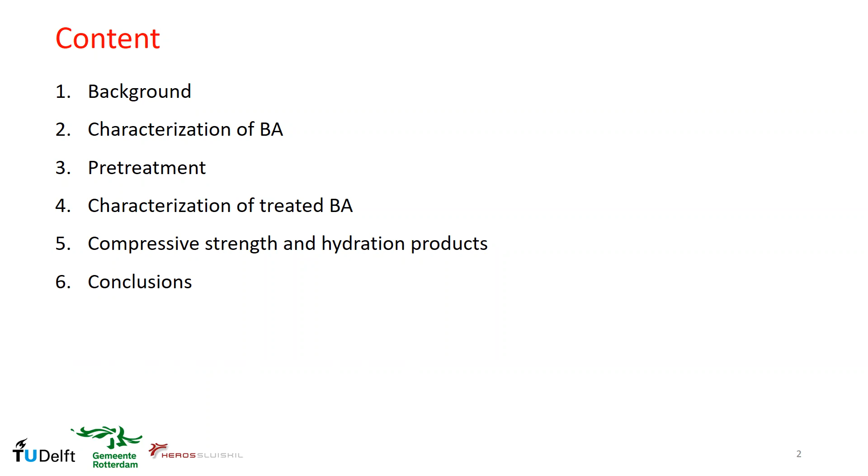And in this special section on recycling materials, I would like to share with you my study on municipal solid waste incineration bottom ash. And the topic here is the potential application of MSWI bottom ash as substitute material in Portland cement concrete. And here is the content I would like to talk about today.

First, the background of this study. Here we see from 1995 up to 2019 in Europe, each person generates about 500 kilograms of municipal waste every year. And we see in more recent years, more waste materials are being recycled and incinerated, and less of the waste is directly landfilled. However, there are still about 25% of incineration waste materials to be dealt with.

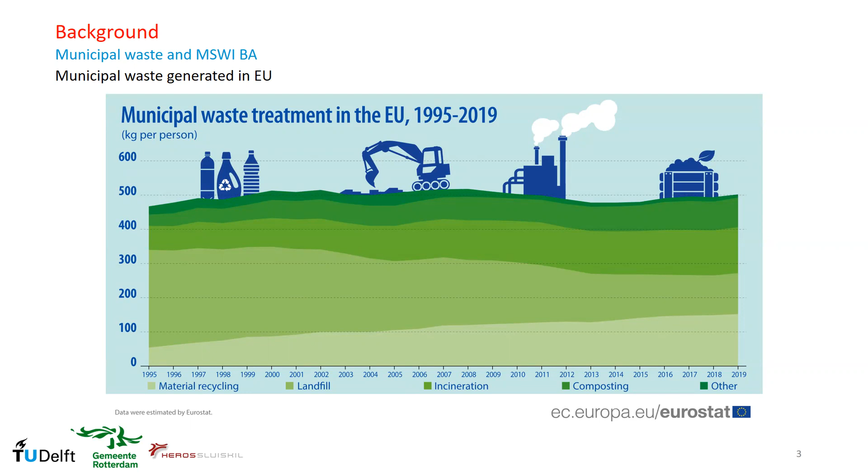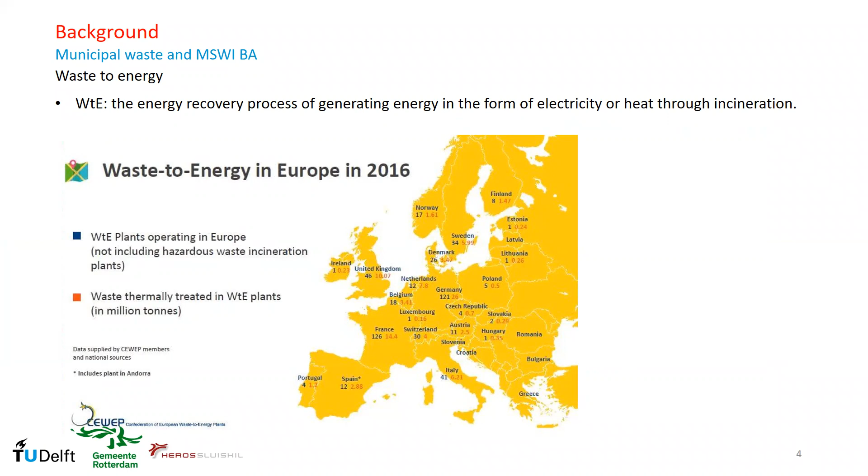And here is the so-called waste to energy process, which is the energy recovery of generating energy in the form of electricity or heat through the incineration process. And by doing so, we have mainly two kinds of byproducts, namely the fly ash and the bottom ash, and they are regarded as zero cost raw material. And their application could be regarded as both the conservation of resources and the elimination of waste. And today, here we focus on the application of bottom ash.

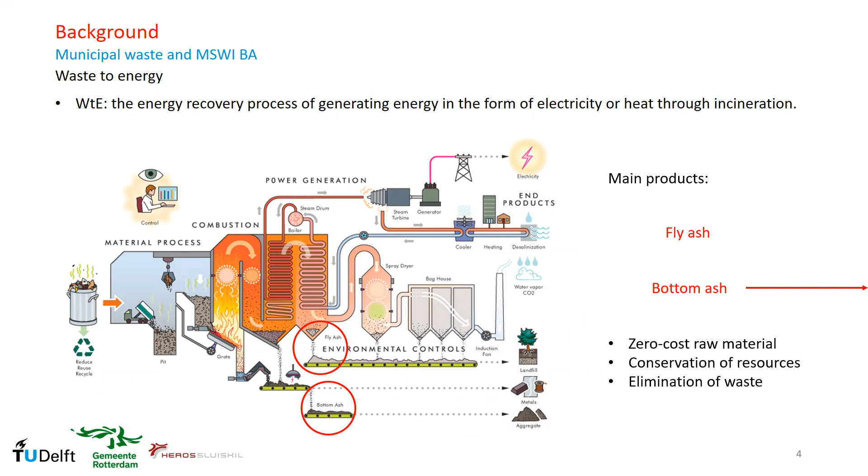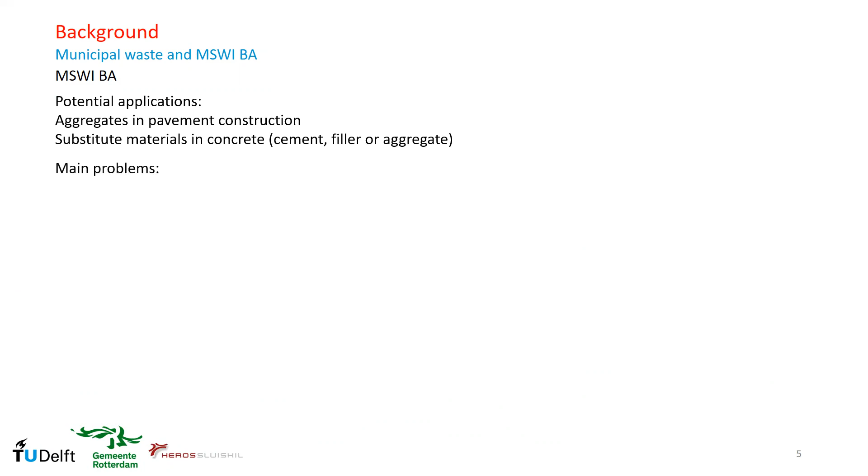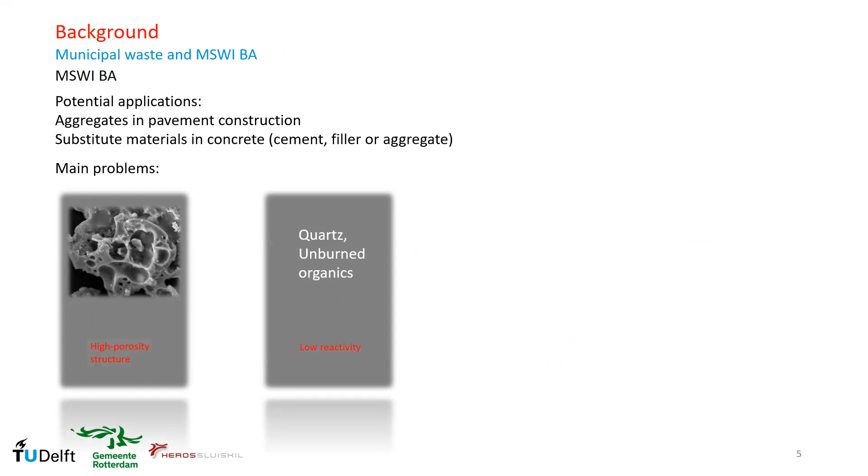And according to the literature, here are several potential applications regarding the bottom ash. First, they could be used as the aggregates in pavement construction, and they could also be used as substitute material in concrete, as cement, filler, or aggregate replacement. However, there are several main problems. First one is their highly porous microstructure, and then the lower reactivity due to the quartz and the unburnt organics.

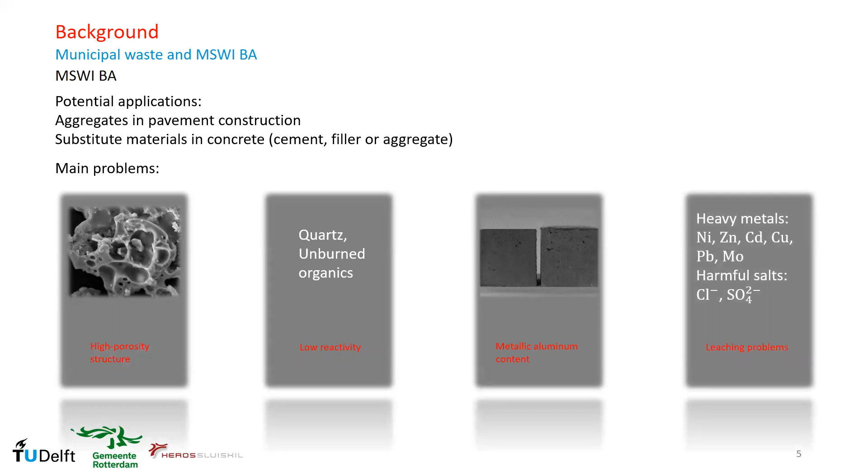And the third one, the volume stability issues due to the metallic aluminum content in bottom ash. They will generate hydrogen bubbles due to the reaction between aluminum and the alkaline environment in Portland cement. And so they will cause expansion in hardened paste. Finally, the leaching issues related to the heavy metals and harmful salts.

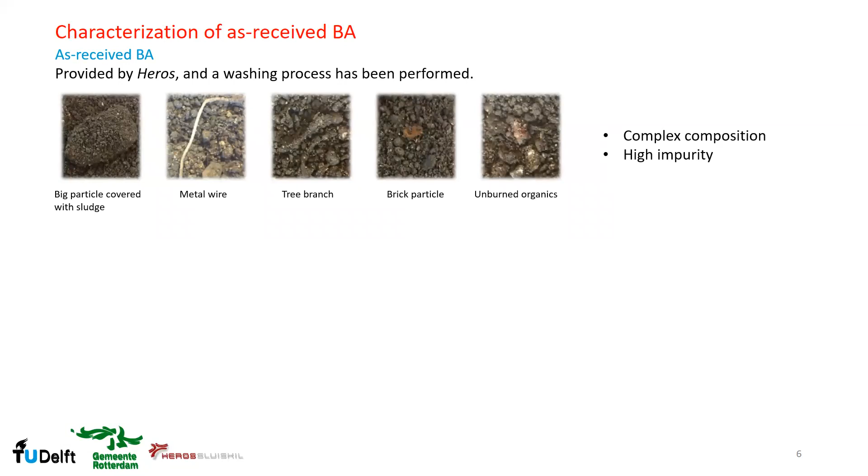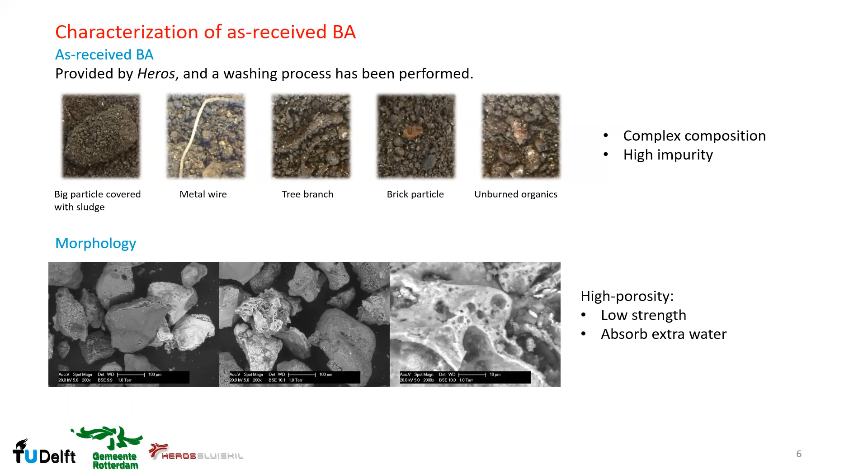And in this study, the bottom ash is provided by a Netherlands company, and they have performed a washing process before delivery, and we see there are still a lot of impurities, and the composition is still very complex. And the morphology detected by SEM shows a very high porosity microstructure, which will result in the low strength of particles. And on the other hand, the pores will act as water reservoirs. They will absorb extra water in the fresh cement paste. So pretreatment should be done before they could be applied as a substitute material in Portland cement.

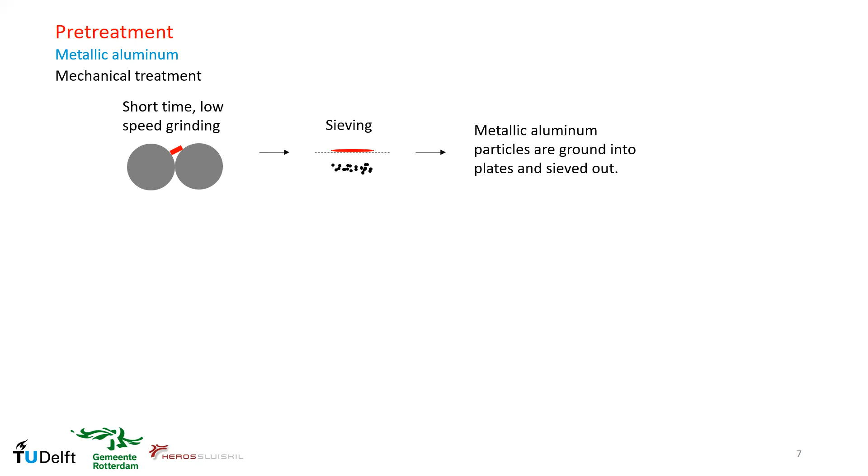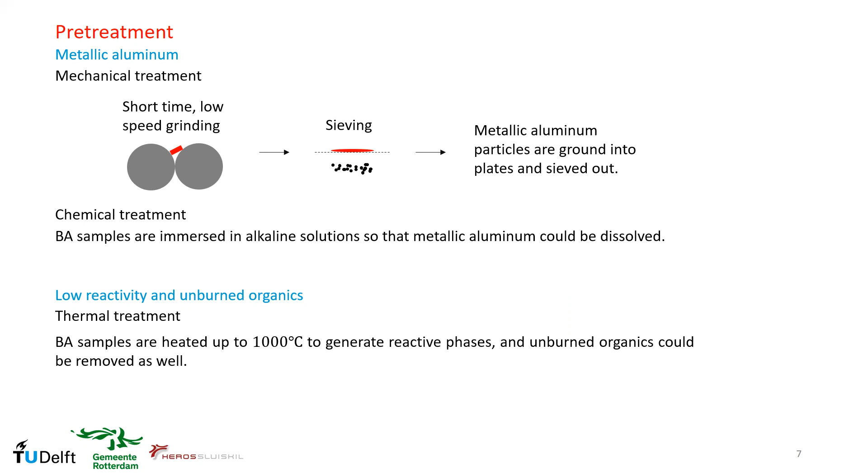Regarding the metallic aluminum content, the first method is the mechanical treatment, which is a low-speed grinding process, so that the metallic aluminum could be ground into plates and then sieved out. And also the chemical treatment, where the bottom ash samples will be immersed in alkaline solution so that the metallic aluminum could be directly dissolved. And regarding the low reactivity and unburnt organics, the thermal treatment is possible by heating up to 1000 degrees Celsius to generate some reactive phases, and also the unburnt organics could be removed as well.

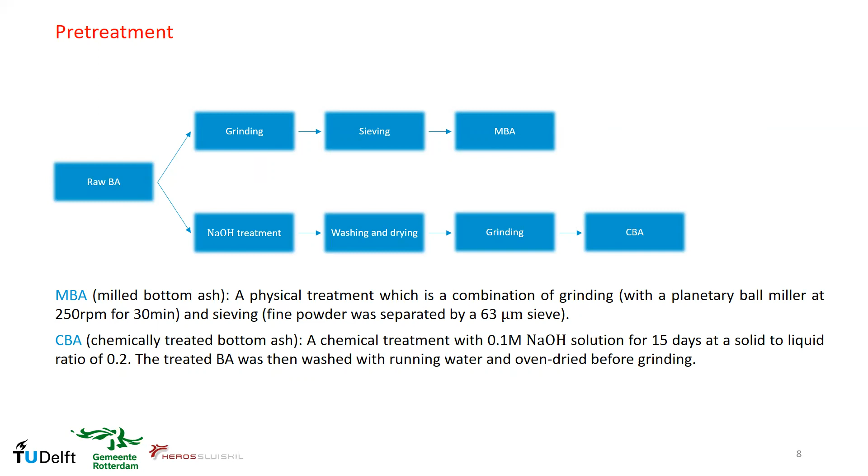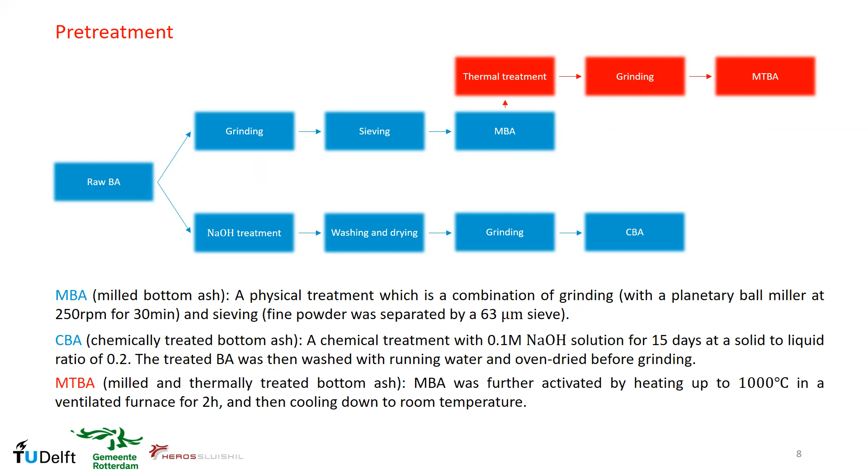So in this study, we have three types of treated bottom ash samples. First, the MBA by a physical treatment combining grinding and sieving, and also the chemically treated bottom ash with 0.1 molar sodium hydroxide solution for 15 days at a solid to liquid ratio of 0.2. And the treated bottom ash was then washed with running water and oven dried before further grinding. And finally, we found that the MBA is not reactive enough, so we further performed the thermal treatment on MBA at 1000 degrees in a ventilated furnace for 2 hours and then cooled down to room temperature.

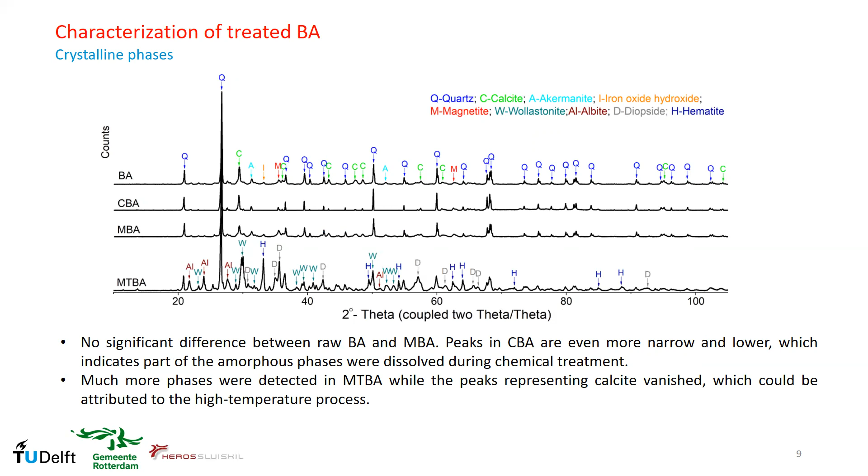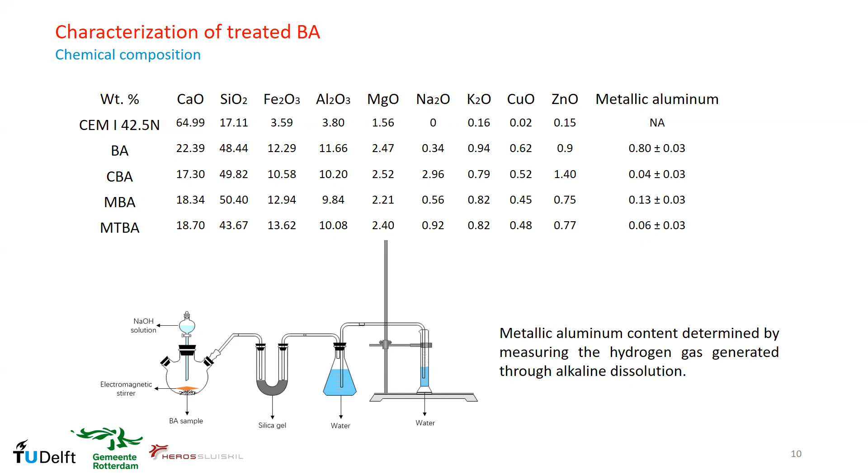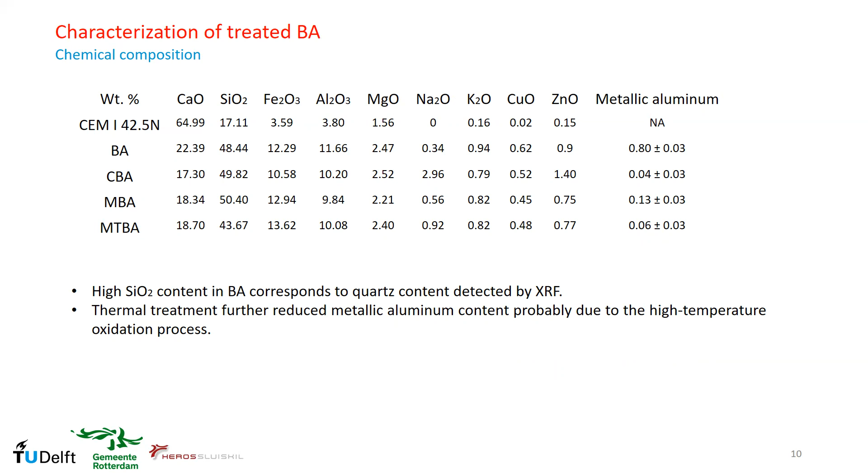The chemical composition of treated bottom ash by XRF. Here we see in all bottom ash samples, the calcium oxide content is much lower than Portland cement, while the silicon oxide is much higher in bottom ash, which corresponds to the quartz peaks detected by XRD. And here the metallic aluminum content is determined by measuring the hydrogen gas generated through alkaline dissolution with the setup illustrated here. And we found out that thermal treatment further reduced the metallic aluminum content in MBA, probably due to the high temperature oxidation process.

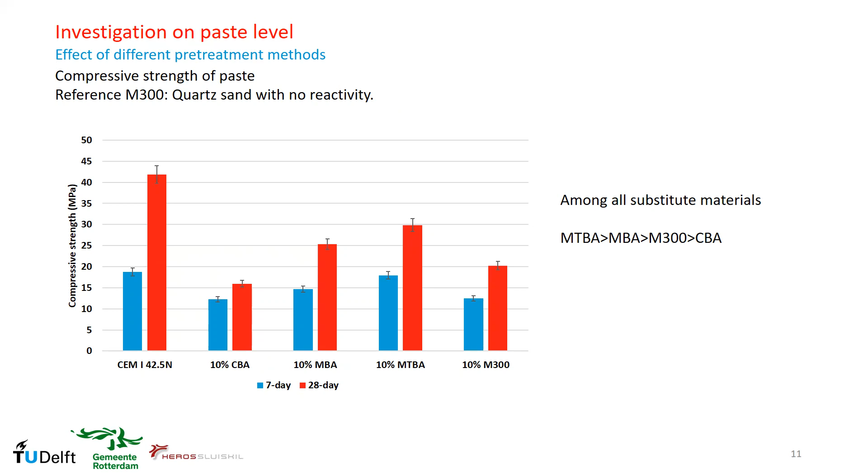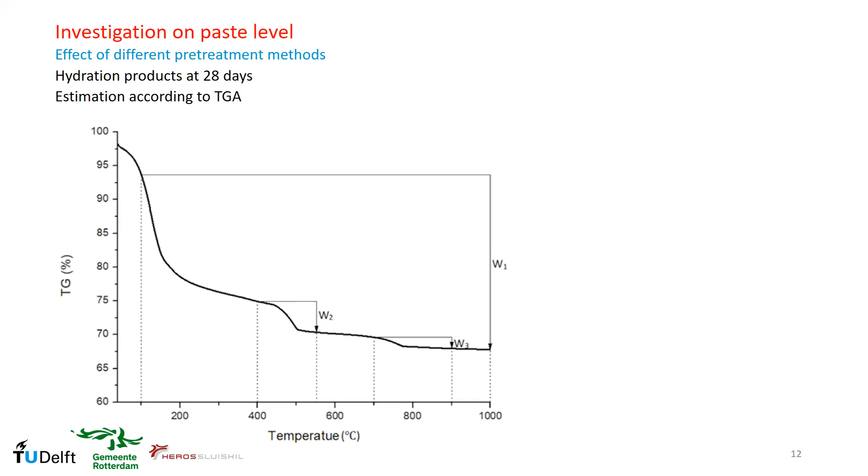Also, the estimation of the amount of hydration products at 28 days according to the TGA measurement. Here we found out the amount of portlandite and the non-evaporable water amount is in agreement with the compressive strength study.

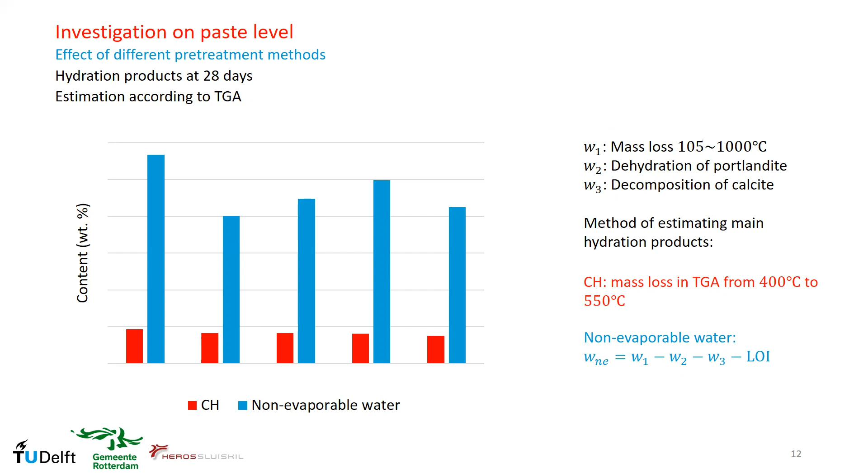So here we come to the conclusions. First, both the chemical and the mechanical treatments are effective to remove the metallic aluminum content. They reduced the metallic aluminum content by 95 and 84% respectively. And some amorphous phases were dissolved during the chemical treatment. And then the thermal treatment further removed the metallic aluminum content and also results in more amorphous phases and higher strength in the hardened paste. However, this high temperature process might be energy consuming.

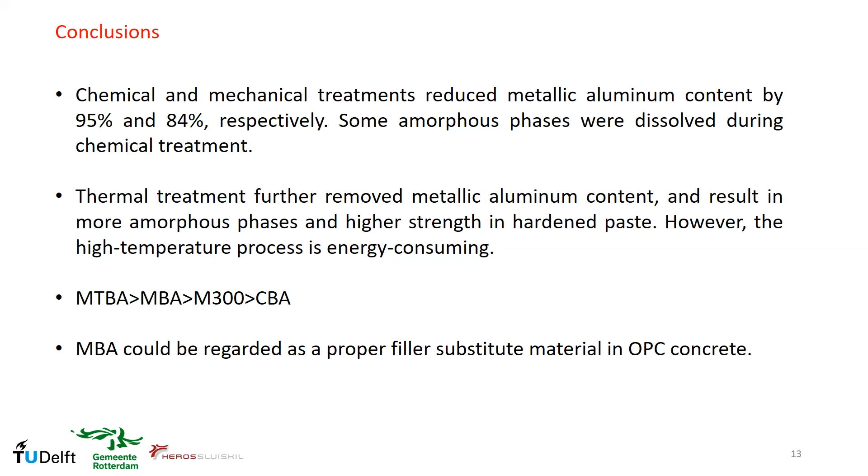Regarding the performance of substitute materials, MTBA is better than MBA, then the micro sand, and the chemically treated bottom ash is the worst. And finally, MBA could be regarded as a proper filler substitute material in OPC concrete.